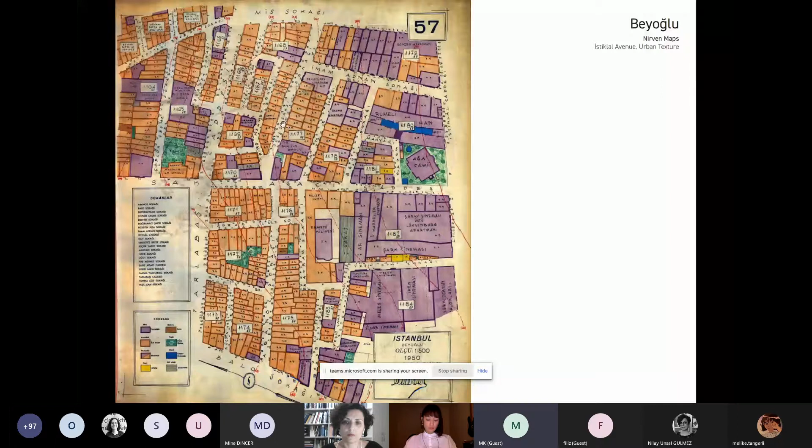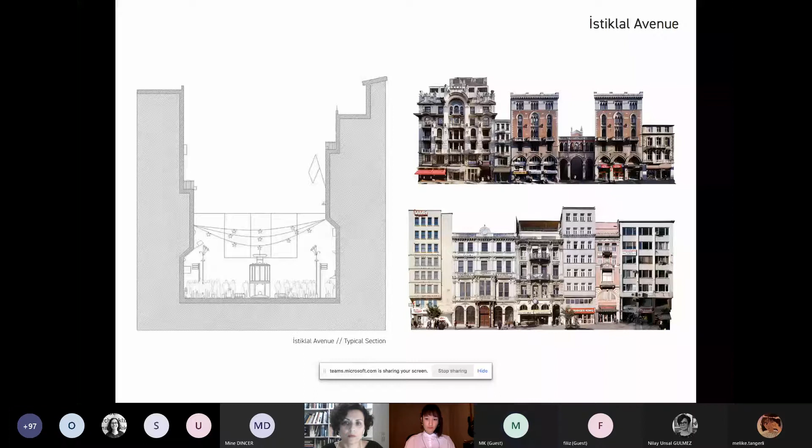Here are some photographs from the 1950s and earlier. And if you look at the boulevard today, it's more or less similar scenery.

Program-wise, the building is an arts and culture building with a conglomeration of related programmatic mixtures. We tried to mark throughout İstiklal Caddesi, on and around it, similar programs, especially by institutions or banks. But this doesn't mean that's everything in terms of arts and culture, because these are the anchors of the arts and culture program. Otherwise, there are a lot of little galleries or production spaces in the district, in the Beyoğlu district.

Yapı Kredi, which is marked by red color, is right in the middle of the boulevard.

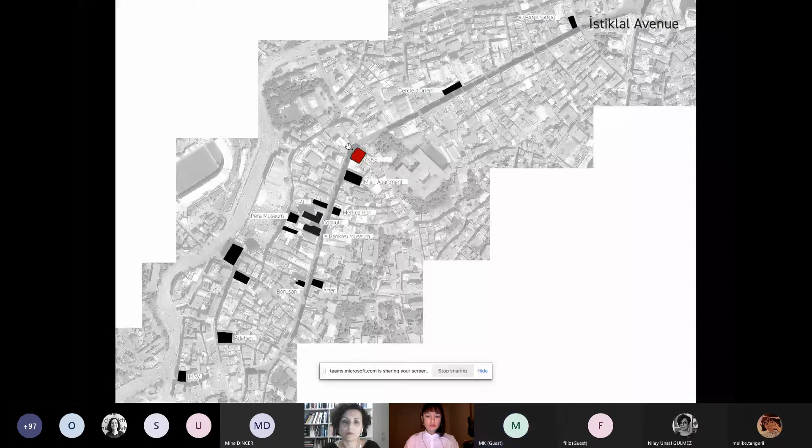This is another map showing you again the 19th century situation, and our building is here, which has gone through a series of transformations that I will show you. But in the beginning, it was not really a square or even an enlargement of urban space, just the T-junction of two main urban boulevards.

One is İstiklal Street, then called Grande Rue de Péra. And the other street, here is the junction, right at the corner of Galatasaray Lisesi. And a postcard shows you a neoclassic three-story building right at that junction, which is this one.

Coming into the 20th century, things started to change a little bit. At the corner of the gate, the Galatasaray School, there is this Karakol, the police station, which is a single-story building, and a couple of auxiliary buildings and the gate. Here still, we don't have that enlargement.

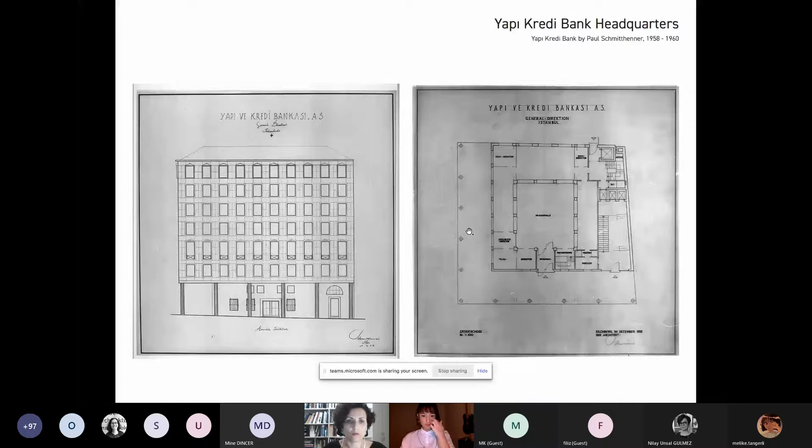Coming into the 80s and 90s, the bank is growing larger and larger. The political situation in the world is also changing. Now we are going into an era of neoliberalist governments, and there's a lot of global circulation of finances.

Therefore, the bank grew really big. As you see in this photograph, think of this pipe as the dividing line. They purchased the adjacent lot and applied the same principles to it, so it became double the size of the original Schmitthenner building. It becomes double Schmitthenner building. And of course...

Because the headquarters later moved to Büyükdere Caddesi, they introduced an art gallery. Maybe you remember those days. The art gallery was occupying almost the whole ground floor. In the corner there was the Yapı Kredi bookshop, maybe some of you would remember. On upper floors it was a mixture of private banking, a publishing house, or a library for old books—kind of a mixture of business and cultural program.

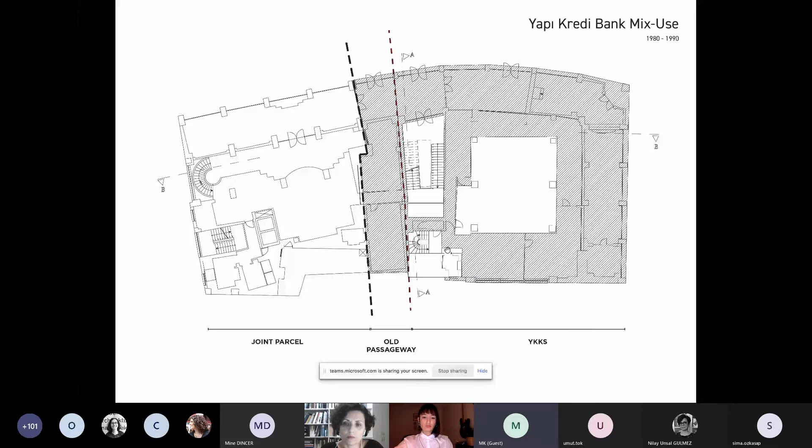So around the year 2009 or 2010, the bank decided to organize a limited, invited competition among prominent architects of Istanbul, problematizing this situation. The main purpose was to recreate a flagship building that is mainly an arts and culture building, but with the possibility of the existing bank branch on the ground floor. Later on, we managed to do without the branch, so we removed it and completely reserved the building for arts and culture purposes.

And this was the first sketch I did. It's interesting because it was the first sketch, maybe the first or second week, I don't know, but it looks very much like the final product. That's why it's very striking to me.

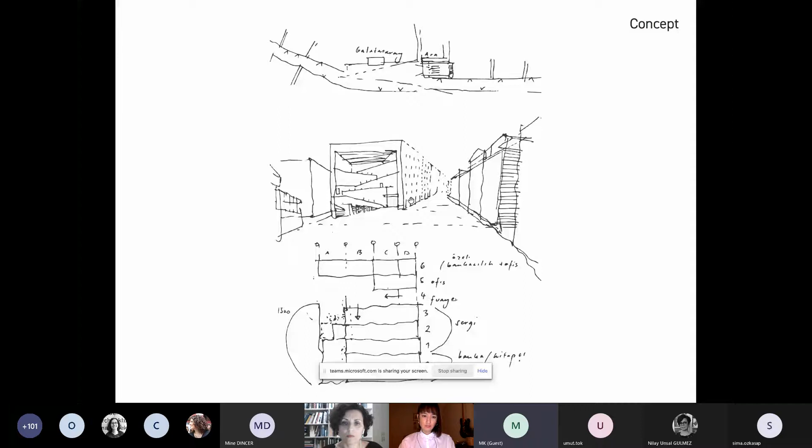The idea is diagrammatized like this in plan—the urban idea. As you may remember, the Schmitthenner building was a very disciplined, nice building, but it did not communicate powerfully to the urban space, because it was one of the very unique buildings in Beyoğlu that had two main facades facing the urban space. Most buildings faced the urban space with only one facade, but this is a corner building that uses two facades to open up to the urban space.

But the urban space is not really a well-defined urban space. It's a slight enlargement of the boulevard in a wedge shape, as you see here, and that is exactly the dimension of the second facade facing the square. Therefore, before, we've been using the word Galatasaray Square for this urban space, but it did not really feel like an urban square.

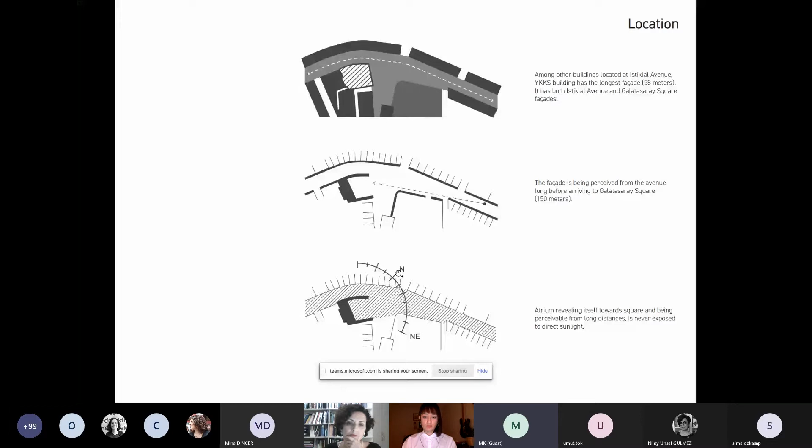And this is to show you in plan and in section, very diagrammatically, how we reorganize the program. On the left-hand side, up is the plan, and underneath we put the sections, and we divide. On the left is the building prior, and on the right-hand side is our proposal.

What we had in the prior, we had a central courtyard which was not functioning because it was too deep, too narrow, not spacious enough, and it was also filled here and there, so that it never functioned. So we removed this courtyard and used this void.

In section and plan, in this brownish color, the urban space is used as the extension of urban space that is creeping into the building three-dimensionally. So it's not a self-contained internal courtyard anymore, but a space between the building and the urban space, and that has the capacity to be both.

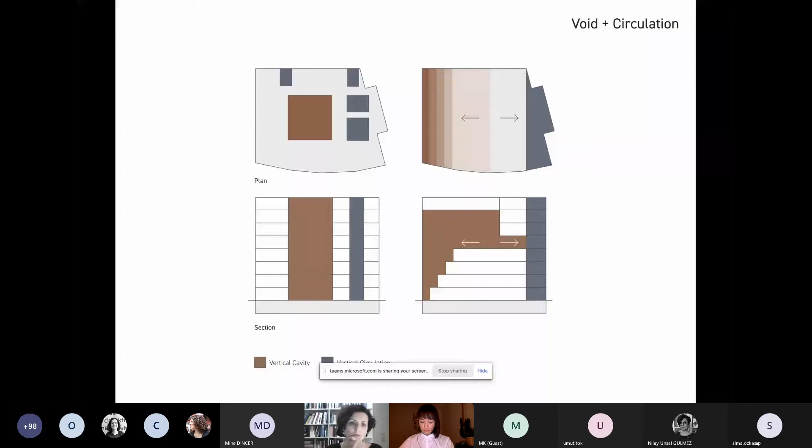So by reorganizing it, even giving a large portion to the city, we still come up with larger program space just by the act of reorganizing. It is important. And this is how we do.

As you see, the facade is not only a facade. It is the interface of a three-dimensional grid inside the building, which is composed by columns and floors, verticals and horizontals. The facade is an outcome of this three-dimensional grid inside, and we use that grid.

We even replaced most of these later on because they proved not to be sturdy enough for earthquake, especially for earthquake loads. These use the same three-dimensional grid that has the interface on the facade. So the shape becomes the structure, the spatial grid inside the building.

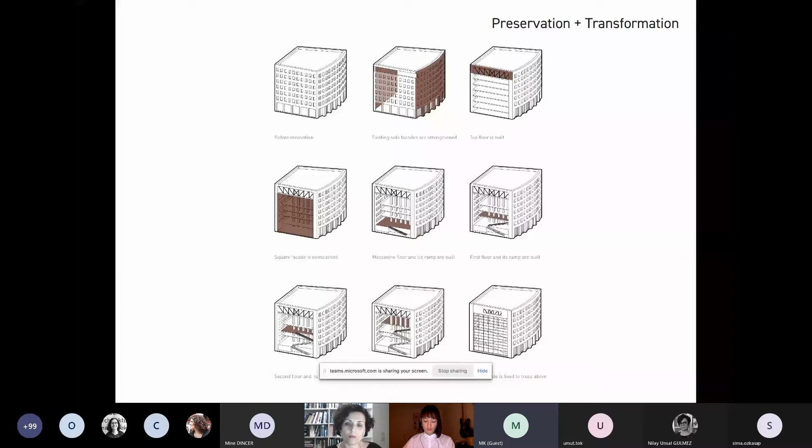It has a variety of cultural programs in it, and it's three-dimensional. Usually, these arts and culture structures are very horizontal buildings organized in a horizontal manner. This time we are in Beyoğlu, and these programs have to be stacked three-dimensionally in order to be compacted within this cube volume. This is showing you, it's almost like a very intricate three-dimensional puzzle of spaces that are coming together in order to create this agglomeration of cultural programs.

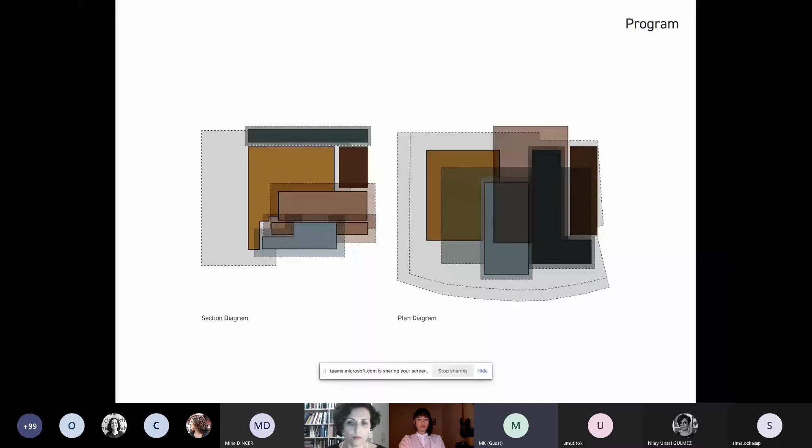And the outcome we call a microcosm, a small microcosmic environment, where each separate element of the program has a baggage of architectural precedents in architectural history. They are coming from different spatial and tactile sensibilities.

For example, it has a bookstore in it, and we are thinking of these mighty 19th century libraries throughout the world. Whereas we have the performance hall, and its foyer is, strange enough, in the back, not the front, of the performance hall, because the performance hall is directly facing the urban space. So we designed it like the backstage or the urban loggia that is replaced by our performance hall.

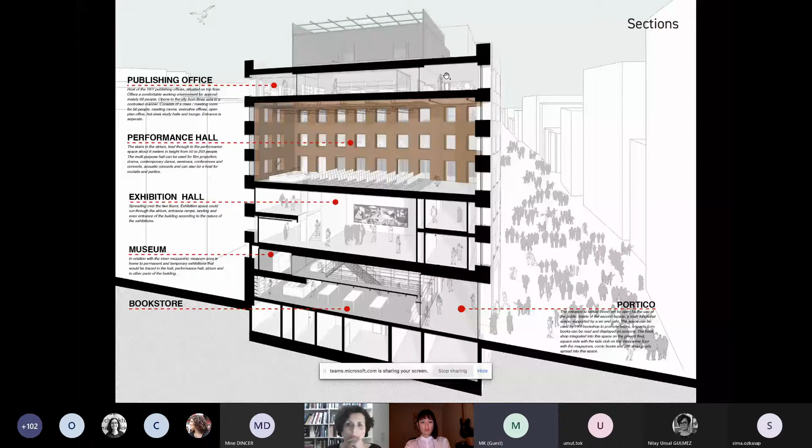This is the section, the reverse section, showing you how we gradually use the vertically stacked cultural programs via the vertical circulation pattern facing the square. This is the screen, and we have these, let's say, zigzagging ramps, and on each landing it meets another program. One of the landings is, of course, reserved for the famous Akdeniz sculpture by İlhan Koman.

And on top it culminates. This is the loggia space, which is also the extension of the urban space, but used as the multi-purpose hall, performance hall. But that is also conceived by us as the continuation of the urban space inside the building.

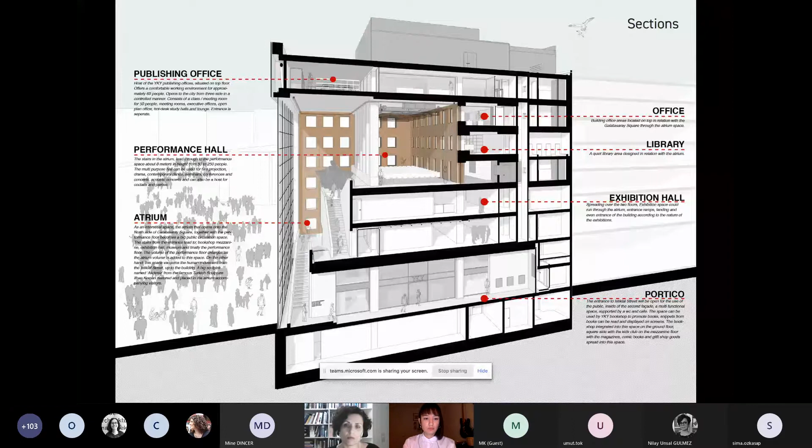It's not a complete void starting from the ground. And as you see in the back, you know how the services are organized. The ground floor is basically reserved for a larger bookstore for Yapı Kredi. It even has a place for children, and also a kind of little multi-purpose hall for talks, also a little cafe.

It uses a double space right in the center where the entry is, and the upper floor of the bookstore is only these galleries surrounding the central space. And as you see, it is surrounded by this U-shaped museum that is exhibiting the collections of the bank. These collections are, let's say, a variety, from very old textiles to very old coins, vases and objects. So they have a big collection, and we cannot even exhibit all of them at the same time, so some of them remain in storage.

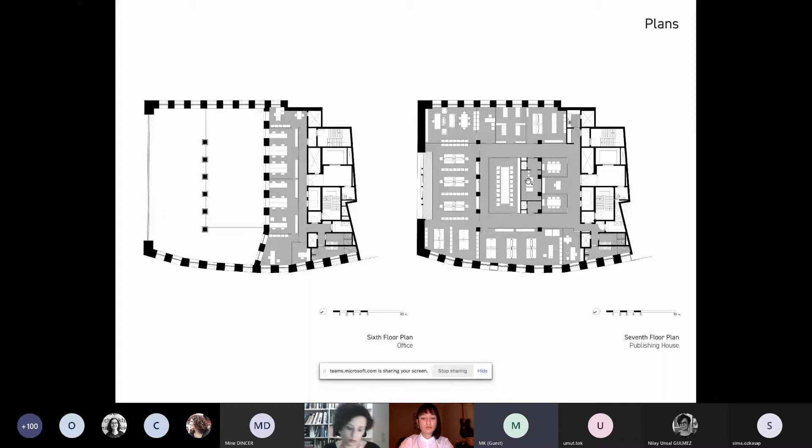When we opened this building, it's kind of shocking because this facade was covered and we opened it in one day. It's a super transparent facade. It's 20 meters by 20 meters, and we used special glass, which is very transparent, and also a very transparent structure.

The cables are 3 centimeters in diameter, and they are stretched. There's this very sturdy frame here. We rebuilt that frame. It's very durable, very sturdy, and we stretch these cables both X and Y direction so that they can hold each other and hold the glasses. So it became a very slender, very transparent, 20 meter by 20 meter facade.

And this transparency is also enhanced by, as I told you before, the quality of lighting inside the building, because the exterior facade becomes the interior facade. There's always daylight inside the spaces. And once you have light behind the screen, it becomes very transparent.

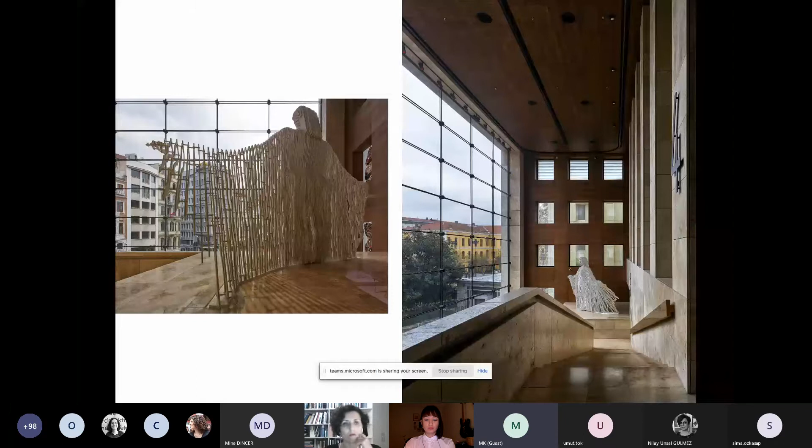And when we go up, the promenade, the vertical promenade, culminates in the loggia, where the performance hall is, and the performance hall is directly facing the city. And behind the performance hall, as I told you before, just like the backstage, it's the foyer. The foyer is also an alternative exhibition space. And this 3-floor high performance hall is almost like a little square up in the air.

And similar things on the upper floors, we have this library, this time completely whitewashed. And through the library table, you see the performance hall and the atrium and the city. So there are these, again, serious juxtapositions of perceptions, one after the other, between the city and the interior of the building.

And at nighttime, of course, with artificial lighting, it becomes even more transparent. The building becomes like a transparent box.